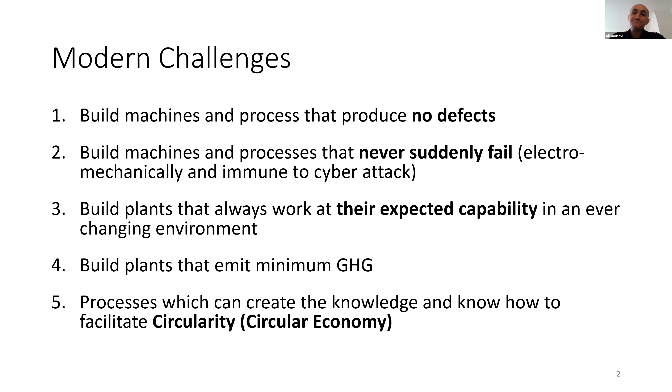So in my interpretation, if we look at the evolution of industry from what we call the origins of the industrial revolution in the early to mid 19th century, we had the foundations of engineering disciplines which had overall direction and created job shops, highly skilled, make-to-order products, all those old workshops.

So from there, in the early to mid 20th century, mass production came to the fore through Henry Ford, as one of the major pioneers of mass production, standardization, machine tools, serialization, bringing down the skill level so that the production cost becomes lower.

That was where the dominance of management science and operations research created tools and techniques of optimizing, line balancing, flow management, etc. Then finally, later in the 50s and 60s, the advent of robotics, automation, and passive adaptive control, mechatronics and control science took the lead and brought us to Industry 3, which is mainly a highly automated, adaptive, passive industry. Basically it is capable of taking sensors and understanding, but quite rugged and not intelligent enough.

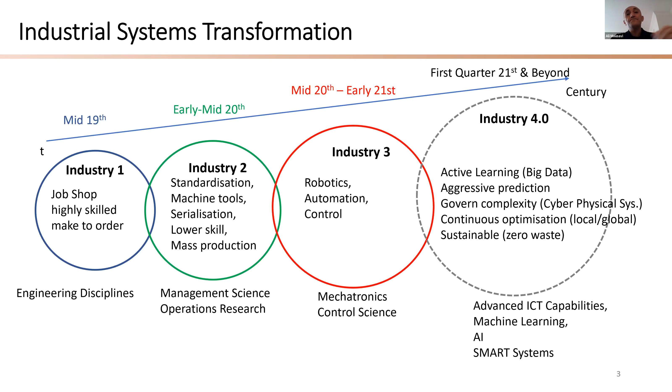So this digital revolution of industrial systems, we go back to the classical systems approach, how we turn this into this system - is basically what we have done the last 40, 50 years.

So we have the full life cycle of systems engineering, where you have the plant, you have the data acquisition capabilities, which is called sensors and actuation. We have the capabilities of data analytics. So we have these data points, they have these signals. We put them together in a format that then it can be translated into mathematical representations, symbolic and mathematical representations.

So we translate the physical system into a digital system. And the closer and more accurate this representation is, thanks to this capability, we can have a good representation of system state.

Once we develop it, we test and validate it, improve it if it requires, then we come with decision making. And that decision making is that how can I improve and optimize or retain or maintain the current optimal levels? If I fall below optimal level, what do we do?

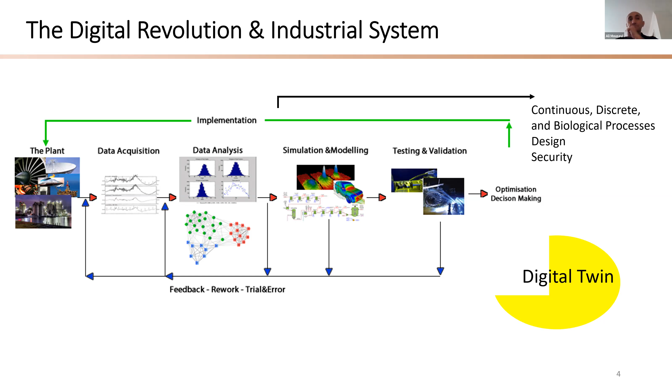So, what is the modus operandi? How do we put this into practice? In my own systems engineering research group, we use two methods, two mechanisms. One mechanism is the traditional mathematical modeling route, which is very, very helpful.

Equations, transfer functions, neural networks, a lot of inferential, physical, and heuristic models that collect the information, use the historical data to represent the system.

However, in many of these cases, in my own research, I realized that these models are not sufficient. Even if we're accurate, we're not timely. And time is crucial for most of our systems nowadays.

We don't have historical information. We don't have capabilities to have those historical information. Our system needs fast response, quick processes. I want to make plastic bottles that pass my molding machine, injection molding machine, at 200 per minute.

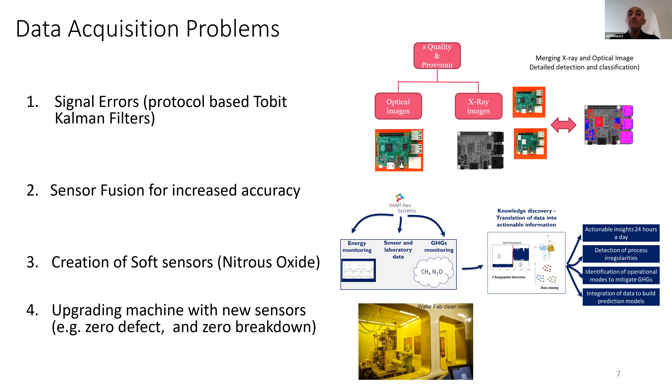The next challenge, after data acquisition, is systems modeling and simulation. Here I don't talk about the traditional modeling, I talk more about the data-driven modeling nowadays that we are working on. So deep learning, neural networks are being used nowadays to create new analytical models, new numerical models, and they're working very well. However, as I explained previously, a lot of these solutions do not necessarily provide a timely or accurate response.

We have seen this in detecting or evaluating laptops in a fast-moving security system in the airports. I have seen this working with Bosch for autonomous vehicle driving. We need a much more complex, much faster situation awareness mechanism and decision making. In the aviation industry, also we have done some work on how to reduce the response time of a specific maneuver, and in factories as well.

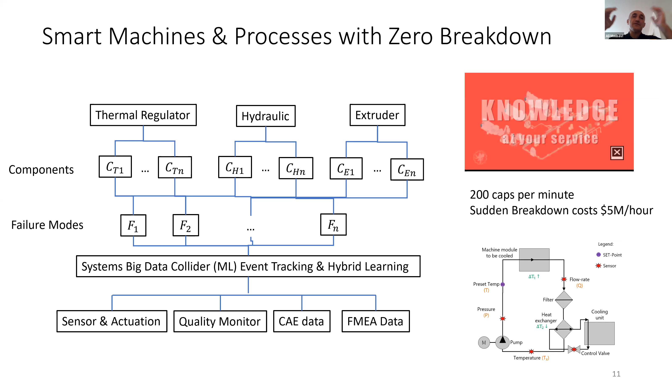He said, oh, this is impossible, and so on and so forth. And he said, you know, when my machine fails in Coca-Cola, for example, or in pharmaceutical, one hour of my machine being down costs the manufacturer $5 million an hour. So you can imagine the value of building a system that you can guarantee will never fail.

So one of the machines that we worked with was a compression molding machine. They make 200 caps per minute. You can't even see the speed of operation, it's so fast. So we had to monitor it. This machine has 144 sensors to monitor every single bit of mechanical, hydraulic, and electrical sanity of the machine.

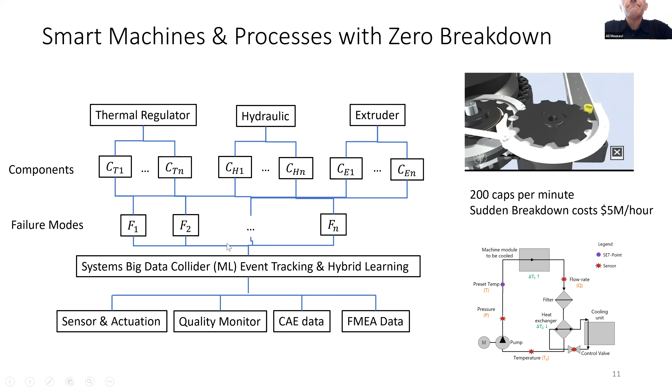So we built a system that totally and fully predicts the remaining useful life of every machine in its own operational environment, and provides a decision support system on how to deal with that remaining useful life or the predicted breakdown.

In another project, we use similar techniques but in a totally different environment. This is in water plants. Here we are dealing with biological processes. But yet again, we are smartifying these systems with the same systems engineering vision, with similar performance indicators or different indicators, but with a very specific objective function, and that is maximizing circularity.

I want to preserve, retain, and maintain water. So I want to maximize the circularity of water.

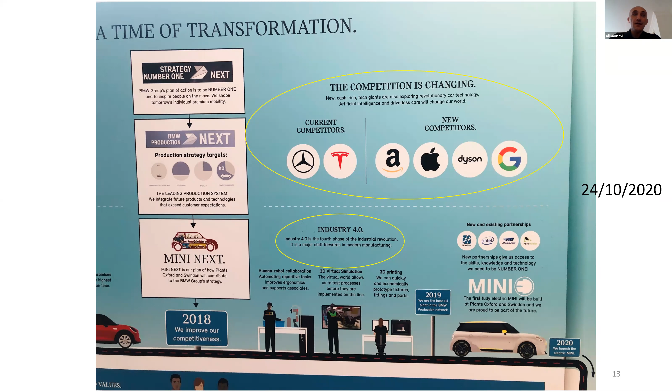These are some of the indicative applications. If you are interested, I have sent the presentation to share with you. These are some of the indicative papers of ours. Thank you very much.

Thank you very much for your presentation. It was very interesting, very exhilarating. So, if you don't mind, I would like to ask you a few questions. Yes, of course, of course.

First of all, in your opinion, if a university wants to train new systems engineers or prepare a new systems engineer, what should we start with? Should we start with cyber physical systems right away, or should we start with engineering disciplines and then build up on that? In my view, nowadays engineering is changing, it's making a major shift.

The classical engineering courses are not sufficient anymore. So what I believe is that we need to create new courses which combine principles of mechanical, principles of electronics, some elements of communications, and operations research. That combination now at different levels. So we can start with general engineering at the first level, but then go to more integration, and then specialization in higher years.

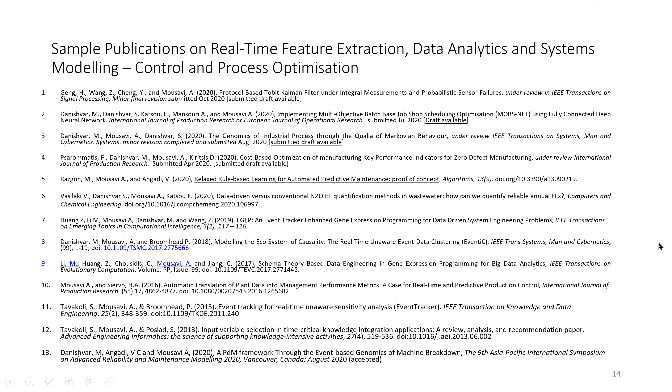Thank you very much. Another question I have is about this event modeling technique that you studied and implemented at several manufacturers. How long would it take to start from scratch, in terms of time and people resources - like a very simple minimum viable product?

With access to that information, it takes about 2 months to implement. On the other extreme, you have systems with not many sensors, or no sensors at all. For example, in one of our projects, a partner makes tungsten cobalt, a hard metal used for tooling and oil rigs. They have forming, hot forming, and machining processes, but they don't have many sensors - most of the work is done by experts. In cases like this, we add sensors where we can to collect automatic data, but we've also created panels so experts or operators can provide observation information. Through that we build our event tracking model. This normally takes up to 6 months.